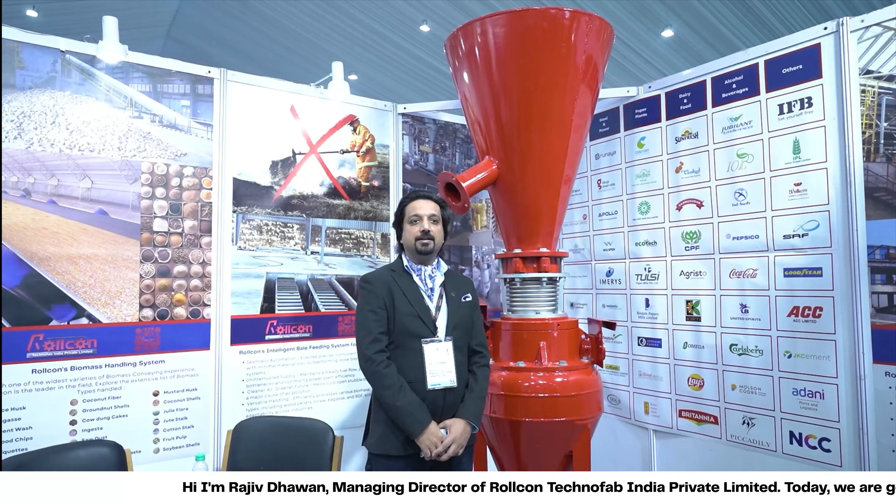I am Rajiv Dhawan, Managing Director of Rollcon Technofab India Private Limited, and today we are going to discuss the surge hopper that we use in a dense phase pneumatic ash handling system.

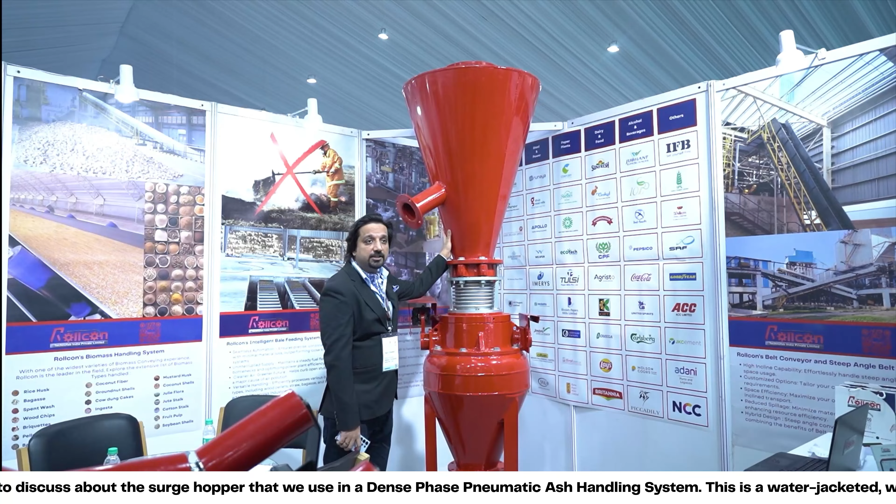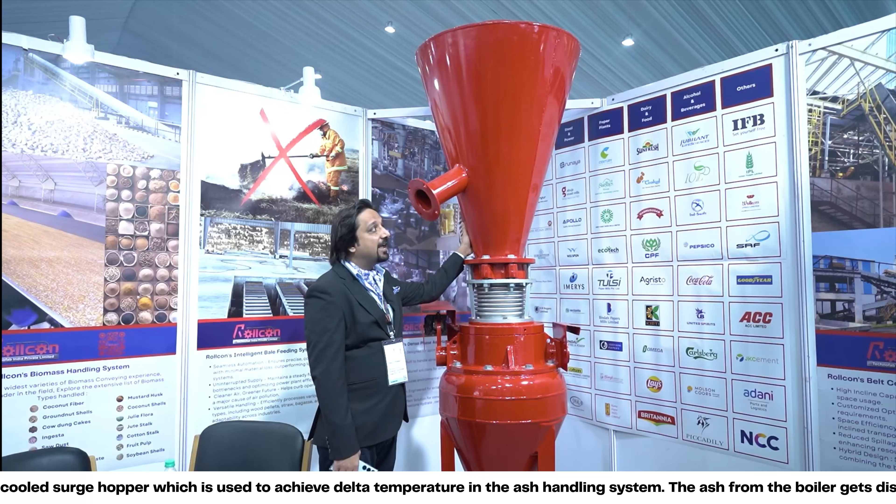This is a water jacketed, water cooled surge hopper which is used to achieve delta temperature in the ash handling system. The ash from the boiler gets discharged into these hoppers and they are water jacketed, and the water flows into them and flows out in such a way that the temperature gets reduced at a faster rate.

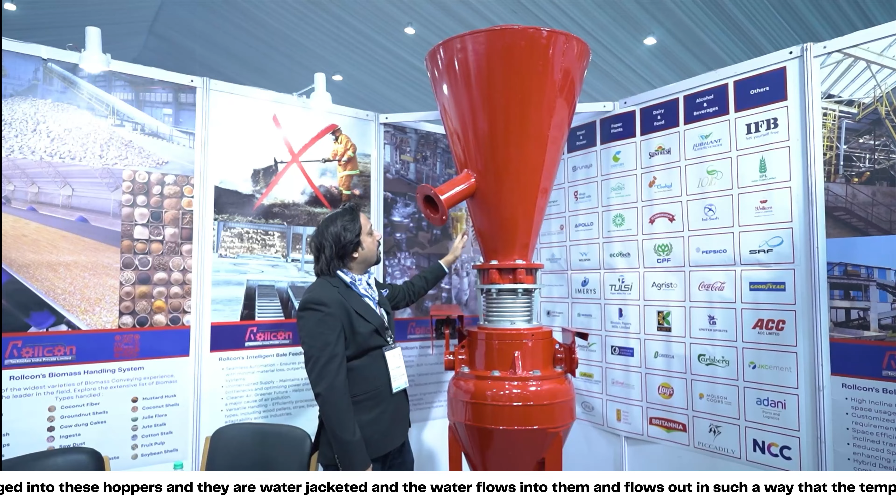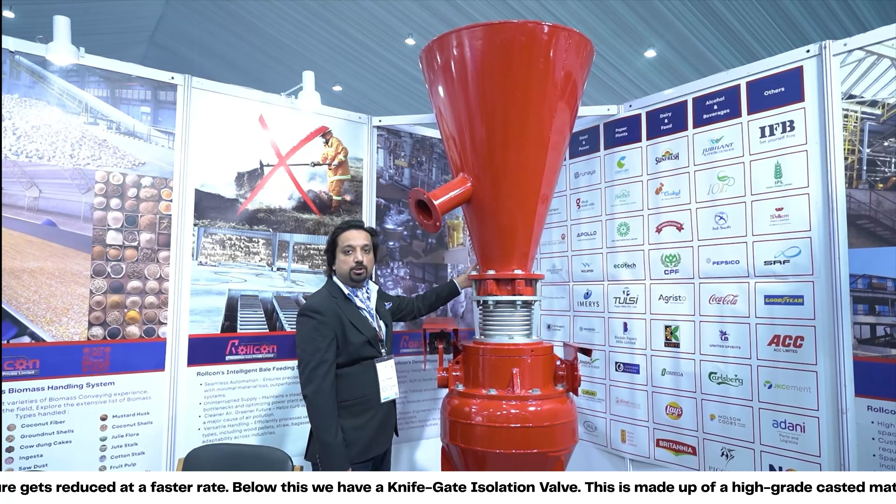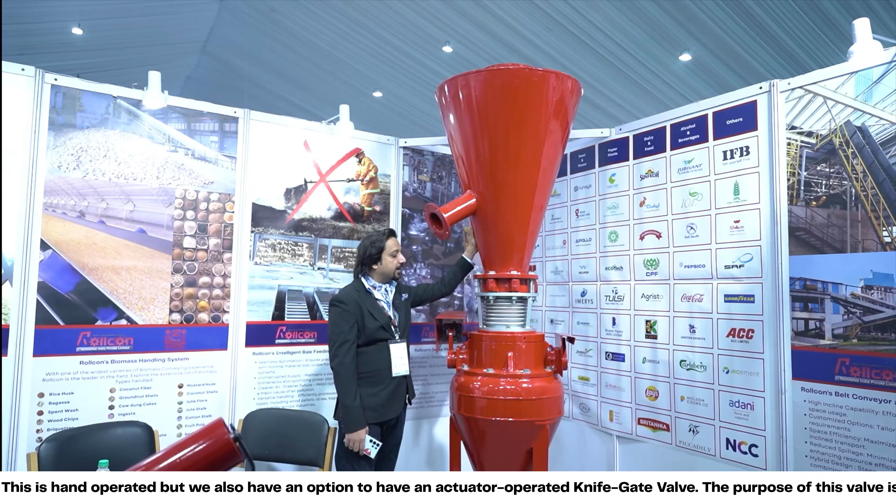Below this, we have a knife gate isolation valve. This is made up of high grade cast material. This is hand operated, but we also have an option to have an actuator operated knife gate valve. The purpose of this valve is to create an isolation between the water cooled hopper and the system below in case there is maintenance required anywhere downstream.

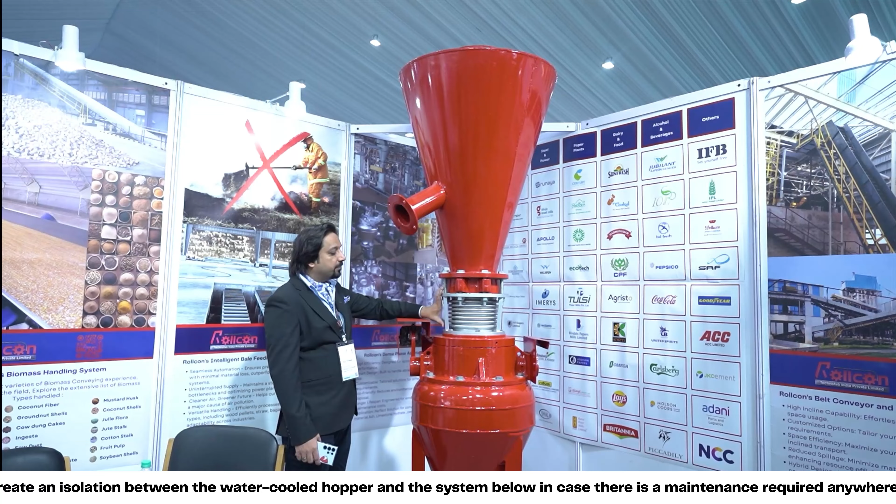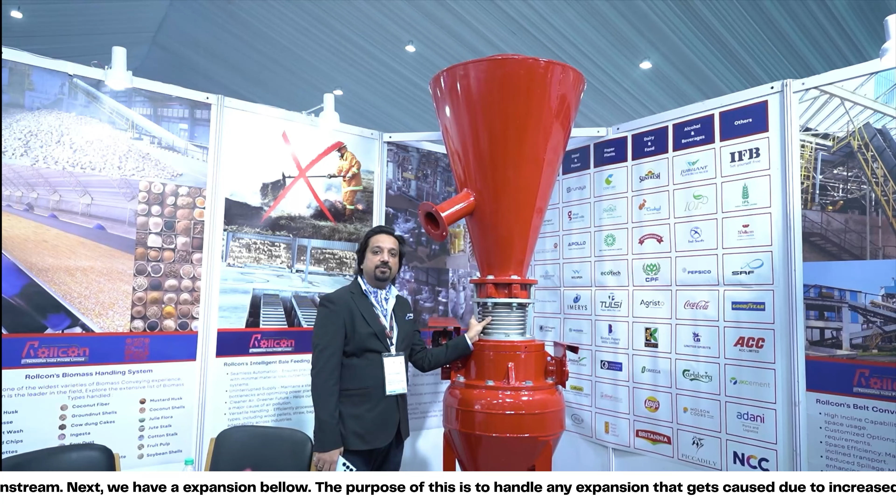So next we have the expansion bellow. The purpose of this is to handle any expansion that gets caused due to increased temperature, and also it takes care of the vibration that gets produced during high capacity transfers of material.

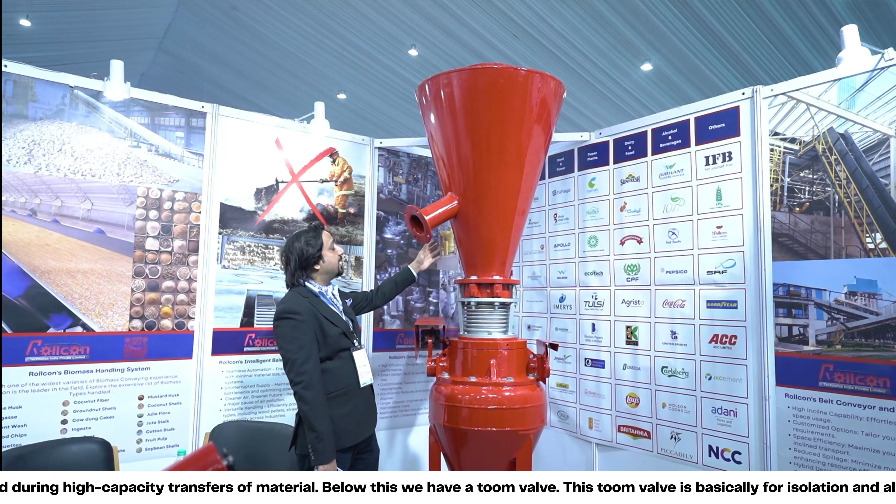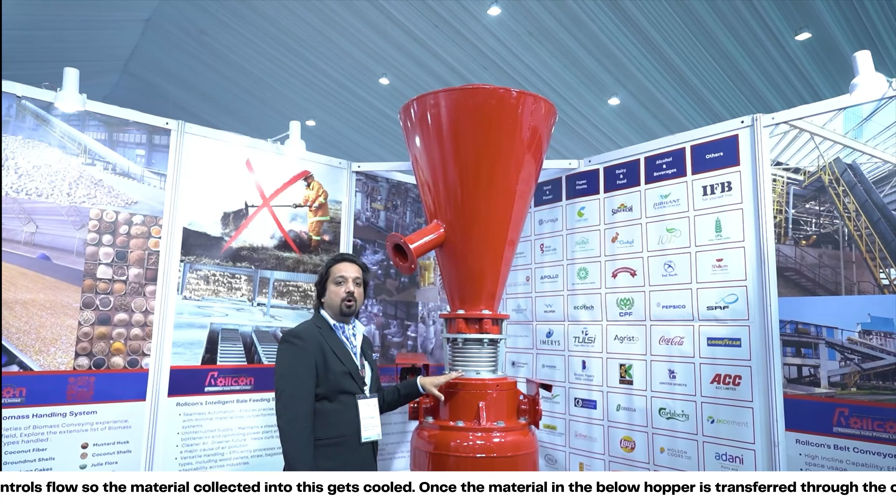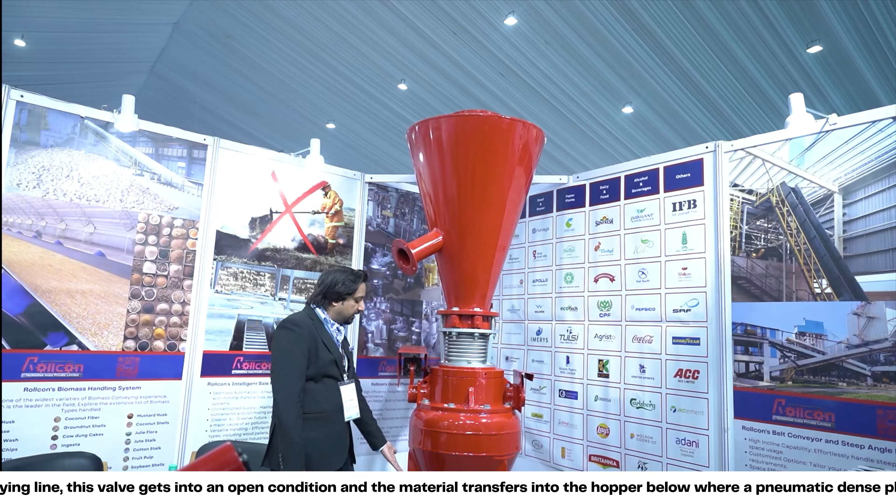Below this we have a dome valve. This dome valve is basically for isolation and also controlled flow. So the material gets collected into this, gets cooled, and once the material in the below hopper is transferred through the conveying line, this valve gets into an open condition and the material transfers into the hopper below, where the pneumatic dense phase line through compressed air is passed on to the hopper and the material gets flowed.

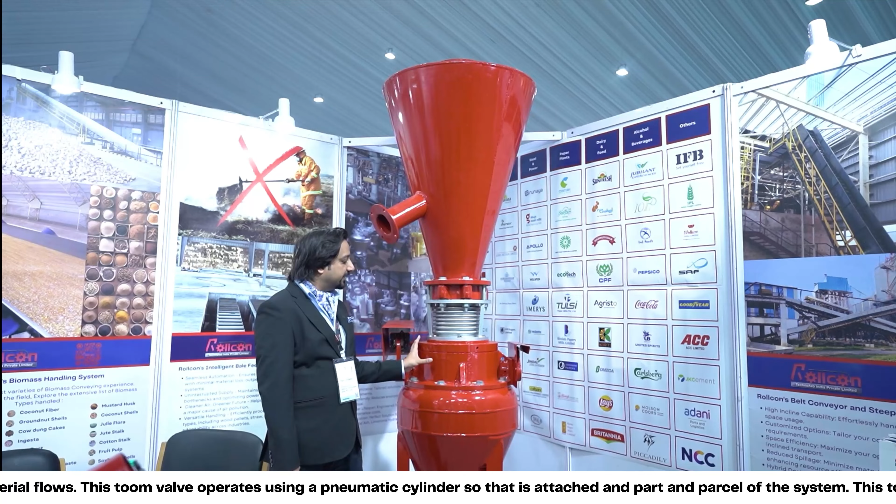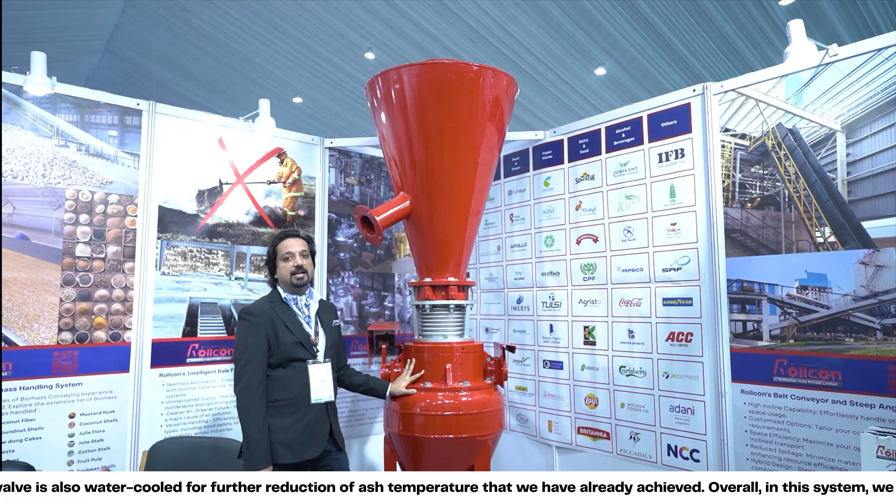This dome valve operates using a pneumatic cylinder, so that is attached and part and parcel of the system. This dome valve is also water cooled for further reduction of the ash temperature that we have already achieved. Overall, in this system, we are able to achieve a delta T of around 150 degrees to 50 degrees, depending on the type of ash and the frequency of the operation of the dome valve.